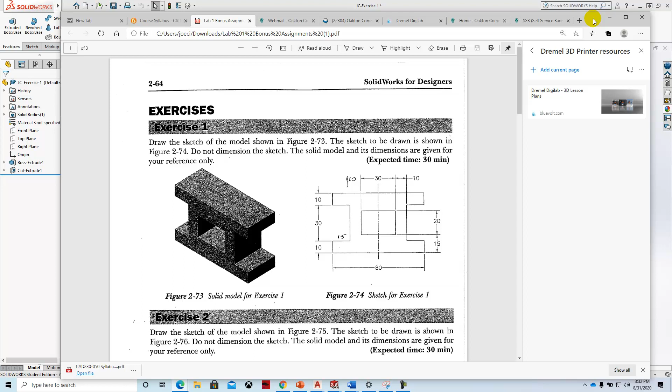I'm going to go and work this exercise today. This is for the extra credit assignments. They're not required, but they're kind of fun and they give you a good sense of how to use sketches. These models are taken from a Solidworks for Designers book, and they have most of the dimensions, but they didn't give the thickness for this part. Other than that, I think everything is here.

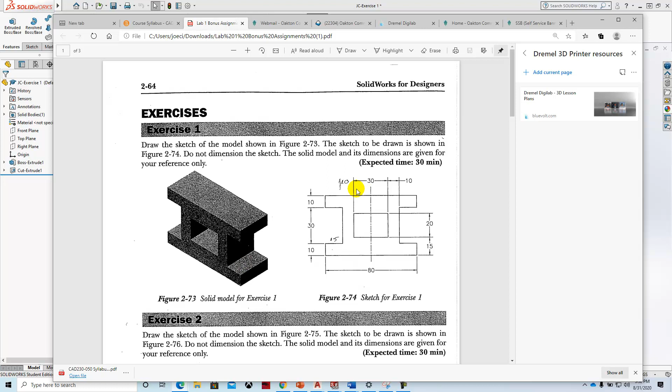What we're going to do is start off this drawing, noticing the units are in metric or millimeters. So I'll say start a new drawing, part, OK. My software defaults to millimeters, so I'm going to switch it... my software defaults to inches, so I'm going to switch it to millimeters. I also don't like this little swash across here. I like it to be plain white, so I'm going to change that.

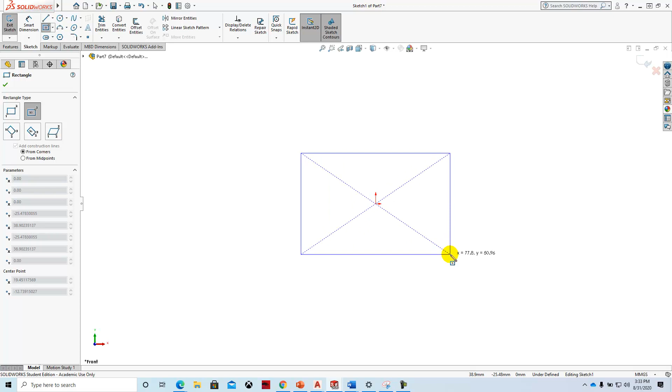I'm going to click on the Sketch tab, select Sketch, and sketch on the front plane. I'm going to start by sketching a center rectangle at the origin, and I'm just going to pull that out. I'm going to look at the numbers and try to make that about 80. Then I'm going to go through and define the rest of it. I'm going to have one more rectangle in the center, and then I'm going to have some geometry here.

I'm going to use trim. I recommend the power trim. All you do is click and drag it through. I'm going to put in a construction line or a center line down the middle here, and you can wake up the midpoint and then just drag that north. I'm then going to mirror these entities about the center line. And I'm going to trim those as well.

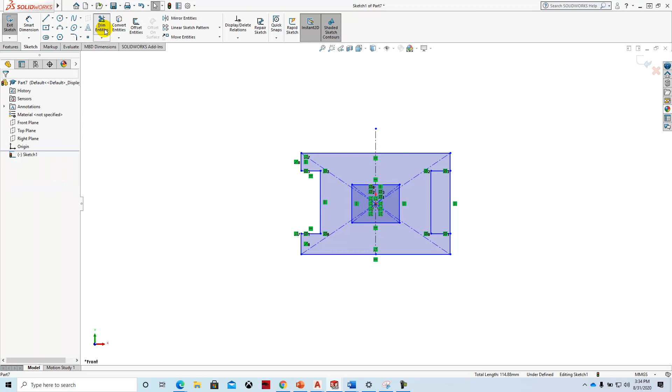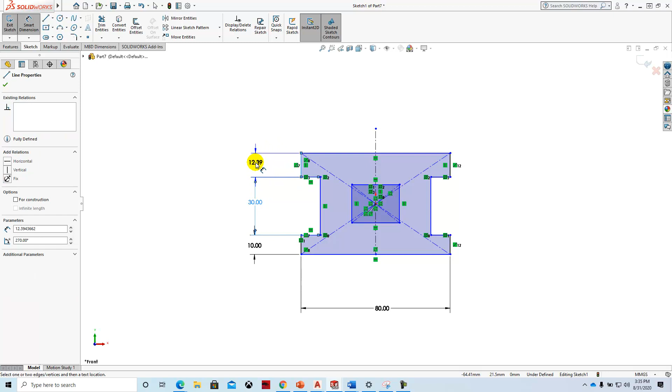I'm going to add the dimensions with Smart Dimensions. And you can see now that all the lines are black, which means that this part is now fully defined.

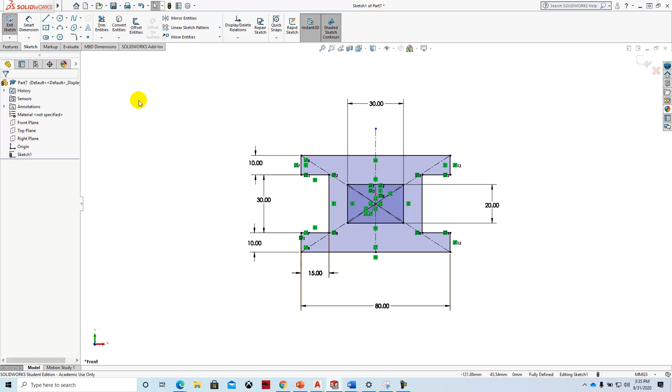I'm going to switch over to Features, Extrude Boss Base, and extrude that about the midplane. And I'm just going to estimate it to be 50 millimeters. Save it.

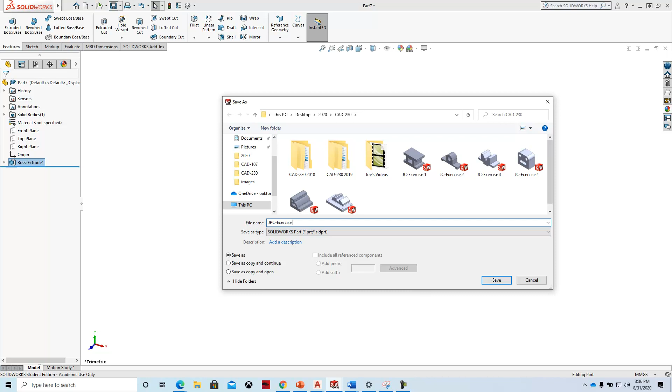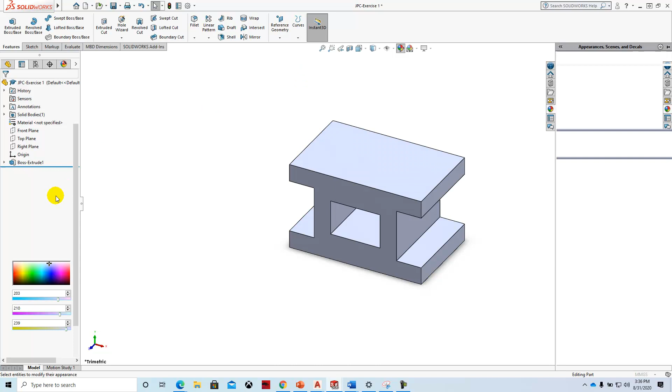And if you want to have a little fun with it, you can color it by hitting the beach ball here. I'm going to clear this, go to part, and we'll make that. We'll make that blue. And that completes this exercise.